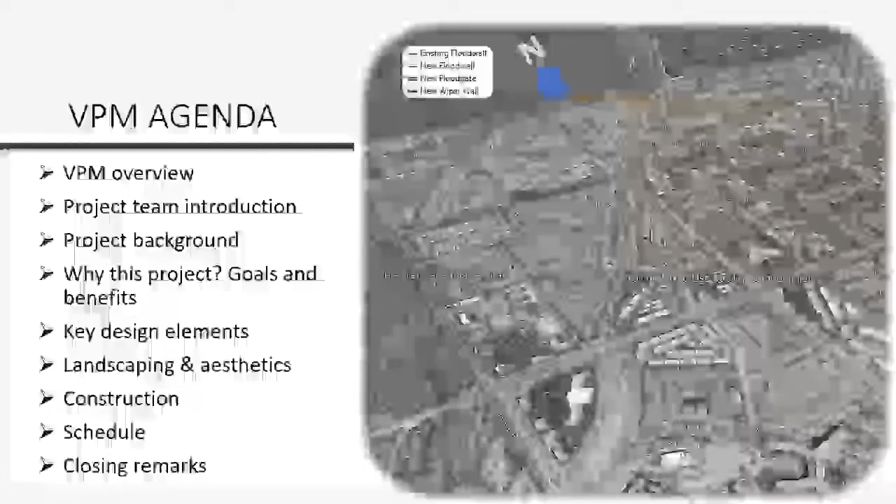The intent of this presentation is to give a broad perspective on the Rawhide Wash Project. We have an agenda that's listed here down the side of the elements we'll be covering in this presentation. We'll start with an overview of the actual virtual public meeting and some details that you'll want to know about with regard to that. We'll introduce our team.

We'll give a bit of a background on the project. We'll talk about the goals and benefits, introduce some of the key design elements, the landscape aesthetics, the construction elements. We'll talk through the schedule moving from this point forward, and then finally we'll wrap up with closing remarks.

Although it would certainly have been our preference to be able to conduct this meeting personally and to be able to see each of you, given the COVID conditions and the current social distancing requirements, we opted to go with this virtual public meeting format.

With regard to the schedule of this format and the meeting itself, we would like to set an official comment period that will begin January 18th and then extend for 2 weeks, ending the close of business January 29th. With regard to the media links and everything that's up on the site where you started this presentation, we will definitely keep those up, and they will remain active and available during the course of the entire project.

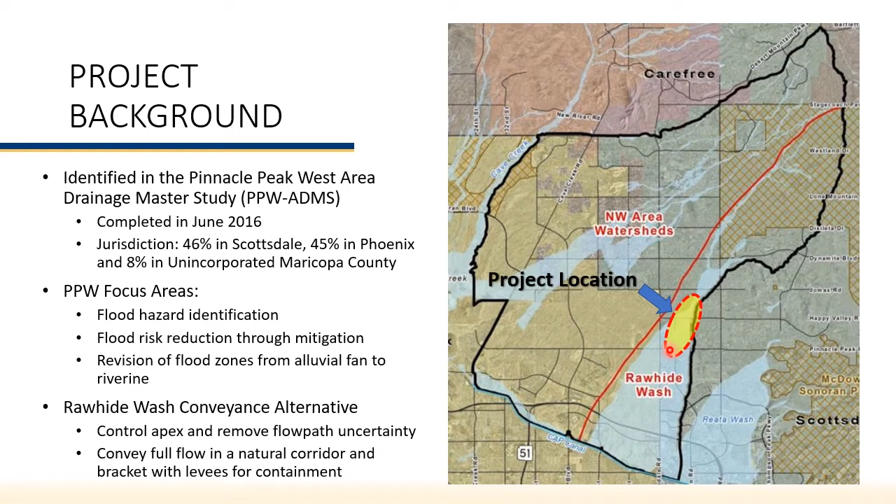The construction portion of the project is primarily located within the City of Scottsdale. All of the construction that we are designing and doing is occurring within the City of Scottsdale, within this reach I'm showing here. Part of the project's deliverables and goals will be to do some redelineation of the Federal Emergency Management Agency, FEMA, floodplain within the City of Scottsdale and the City of Phoenix, all the way from the fan apex, which is indicated by the star north of Happy Valley Road, down to the confluence of Rawhide Wash with the Central Arizona Project dikes, in particular dike number 2, that extends along the north side of the CAP Canal and contains pretty much all the flow. It's a very large dam, and if you've ever driven past that, you can see that it's a very large dam-looking structure.

Overall, with the construction of this project, there is going to be a removal of just under 1,900 acres of land from the floodplain. That's going to be converted from this current alluvial fan floodplain that is generally outlined by this limit here, and the red area is going to be removed from the special flood hazard area, and the blue will remain in a special flood hazard area. You can see the split between the City of Phoenix and City of Scottsdale acreages, and this project design will be such that it will mitigate the 1% annual chance exceedance event, or in layman's terms what is commonly known as the 100-year event.

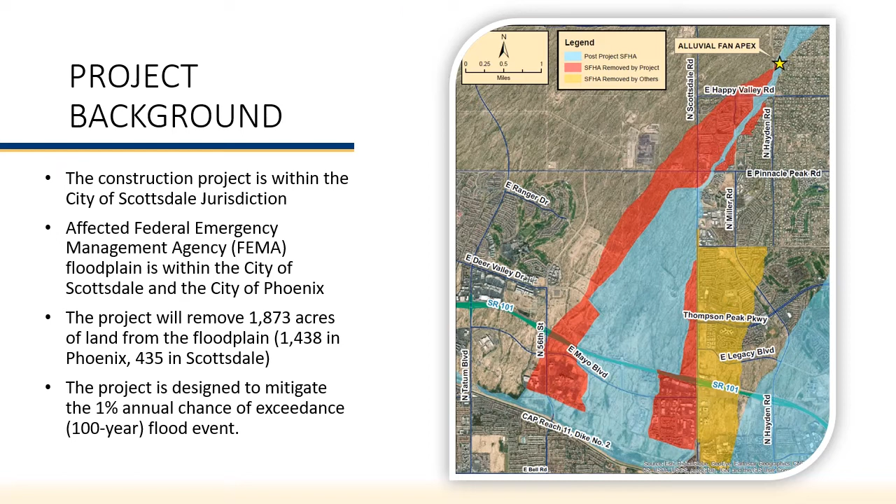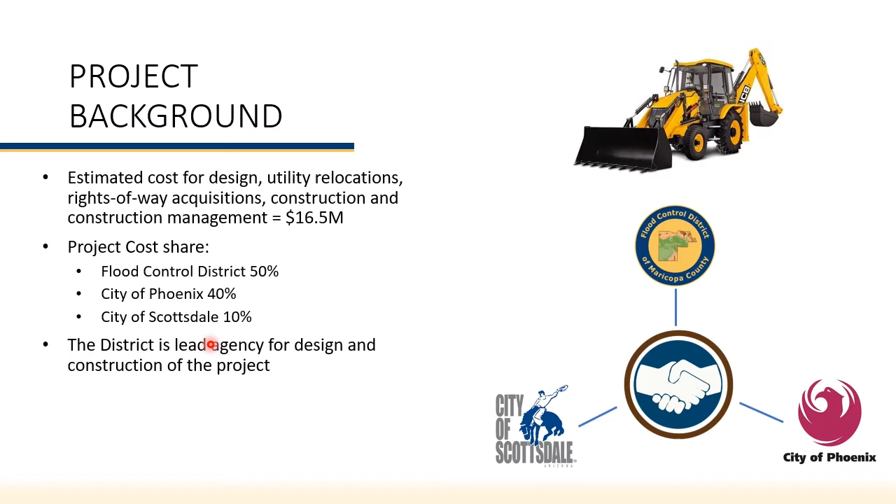At this point in time, we have an estimated cost for the design, the utility relocations, the right-of-way acquisitions, construction, and construction management of around $16.5 million. That cost will be shared between the Flood Control District at 50%, the City of Phoenix at 40%, and the City of Scottsdale at 10%. The district will be the lead agency for the design and construction of the project, but there is lots of input from the project partners, Scottsdale and Phoenix, and in particular Scottsdale, since most of the construction is within the City of Scottsdale.

Regarding the official authorizations for the project, there have been several IGAs and resolutions adopted by both cities and Maricopa County, through the Flood Control District, beginning with a resolution in April 2018 that authorized the Flood Control District to develop the IGAs with the cities. Those IGAs were originally formulated and approved in January of 2019, and authorized the design, rights-of-way acquisition, and utility relocation. So it got the ball started on the design process. In March 2020, another IGA was created that authorized the construction management and operation and maintenance of the project. Within that IGA was a provision to move towards a project delivery process called construction manager at risk.

What that means is that the contractor, in this case Rummel Construction, will participate in the design process and then provide a bid estimate that will be locked in once it's finally approved, and there will be no room for change orders or anything along those lines. So it's a way to get a project delivered, and there's more conversation about this process and its benefits in the detailed presentation that is also on the website that you can download and listen to at your leisure.

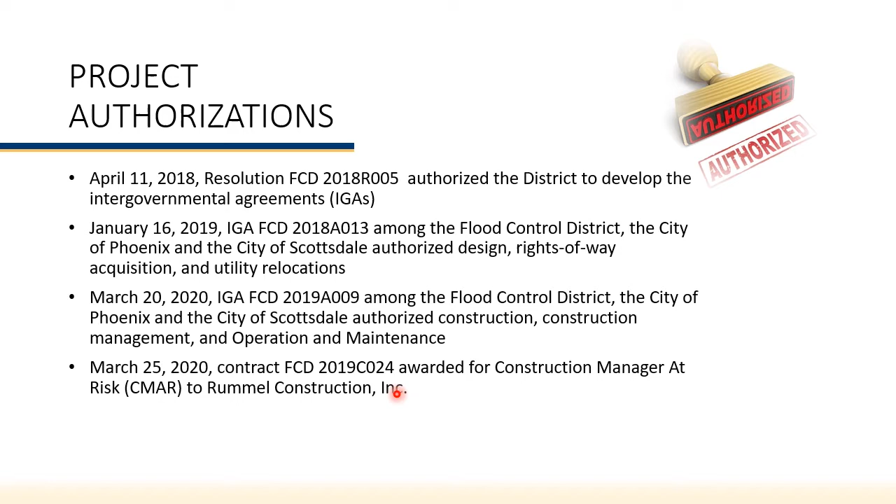This project has many goals and benefits that I wanted to briefly touch on. First of all, with the construction of this project, we're providing 100-year flood protection for more than 850 homes and buildings that are currently at risk. That's across both cities and even the unincorporated county areas, but the lion's share of those 850 structures lie within the City of Scottsdale. There's going to be a reduction in the actual floodplain, which will lead to not having mandatory flood insurance for mortgage holders on properties that are currently located in the special flood hazard areas that will not be after the FEMA process is completed.

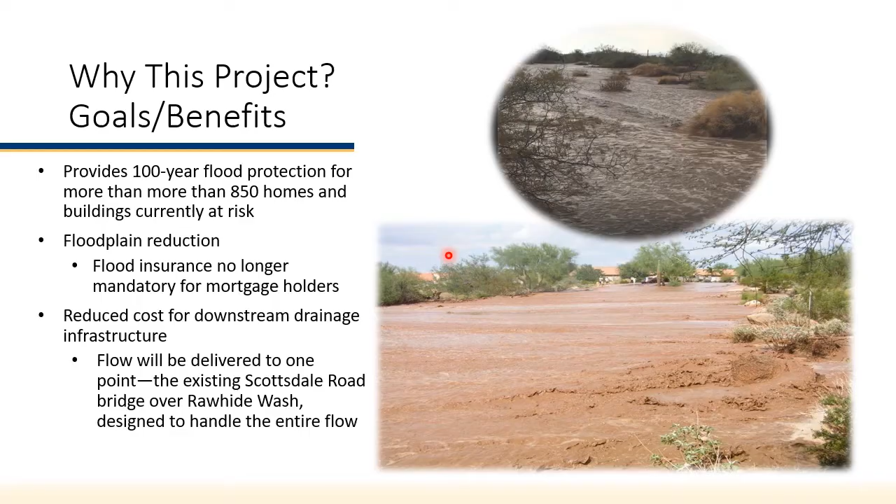There's also a reduction in cost for downstream drainage infrastructure because of the nature of an alluvial fan. There's a lot of potential redundancy in drainage infrastructure costs in the downstream area that will be removed by the building of this project. The flows will be captured and conveyed to one point that will then be available for the next project downstream to pick up and continue on downstream towards the final destination at the CAP Bureau dikes.

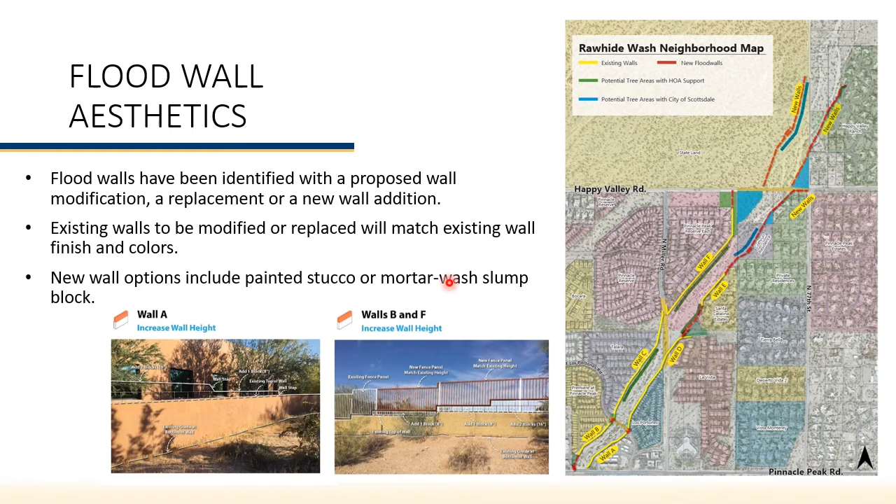In the areas that we have identified disturbances for, we know that we will be doing plant inventory and native plant salvage per the City of Scottsdale ordinances. In general, the width of the disturbance area adjacent to the existing corridor walls along the Rawhide Wash in the developed areas is somewhere between 30 and 40 feet. It may extend out even further by 10 or 15 feet in some areas where we have exceptionally deep need for erosion protection. But the reality is most of it's in that 30 to 40 foot width, and some are much less than that.

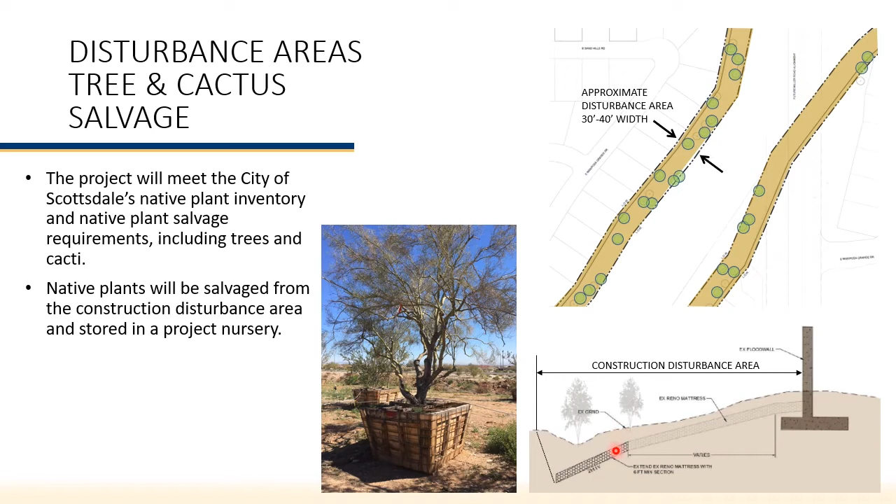The native plants will all be salvaged as required and nurseryed, and then the intent is to put them back into the wash at locations where they make the most sense. In the disturbed areas, the restoration of the landscape is an important element of this project as well. As we discussed before, there is going to be a limit of disturbance, and once the walls are constructed and the erosion protection's in place, the grade will be restored mostly back to the original grade that's out there now, and then the revegetation will be completed.

Three components. The salvaged material will be revegetated back, hopefully in the same or near the same areas where it came out. There will also be the use of the flood control district's tall pot trees, which are pictured in this area right here. They grow these in a PVC tube, get them established, they get planted, remove the PVC tube, and they have a really high success rate with these taking root, and they don't require irrigation. So that's something that will be used extensively in the project as well.

And then finally, hydroseed. The hydroseed will bring in a native desert plant mix of seeds that are already out there, for the ground cover areas. What that might look like after a few years of growth is up here in this photo. So the restoration will be completed at the end of the project. There will be a 10-foot clear zone maintained adjacent to the walls for maintenance and inspections. But for the most part, the intent is to restore the vegetation back, with the potential within several years of coming back to what is out there now.

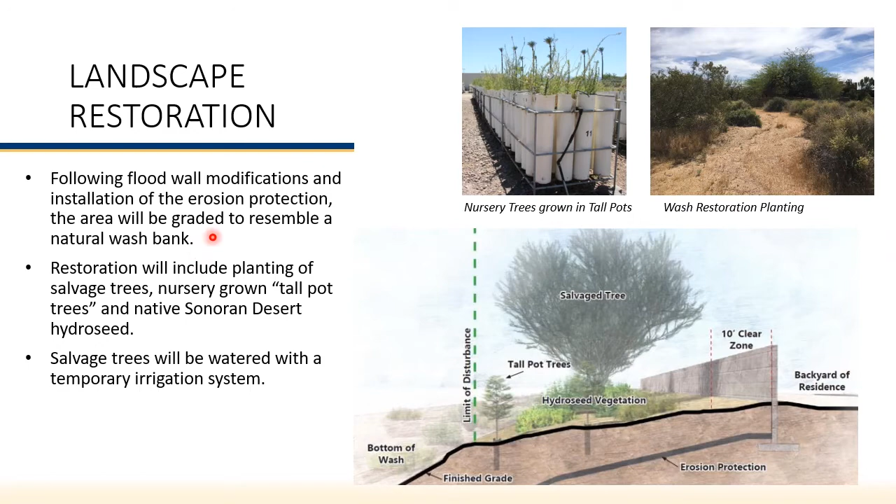Also, for further details of the landscape aesthetics and aesthetics of the walls, please see the recorded version of the landscape and aesthetics details presentation that's on the website. You can find that at the same place where you're viewing this from, and it will go into much greater detail on some of these elements.

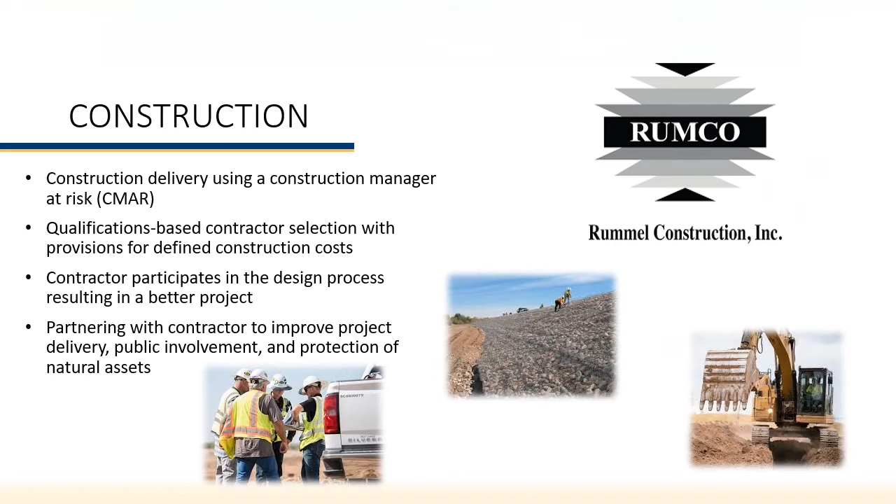By way of a project timeline, we'll start with where our 60% design submittal was made in March 2020. During the review at that time and looking through those 60% designs, the discussions began with the Miller Road project, and officially as of October 2020, the Miller Road project started and was underway. And the beginning of that project definitely shifted the overall Rawhide Wash project design schedule out to accommodate what would eventually be a portion of that Miller Road project, which is the bridge and abutments and the approaches at the crossing of Rawhide Wash.

Those elements now have to be incorporated into the Rawhide project. So we had to kind of put the Rawhide on hold for a bit while we waited for Miller Road to get caught up. We're here at our virtual public meeting at this point. The intent is, once we get through with the meeting and have received public comments, and some additional information out of the Miller Road project, we'll wrap up and finish our 90% design package and make a submittal to the reviewing agencies by the end of February 2021.

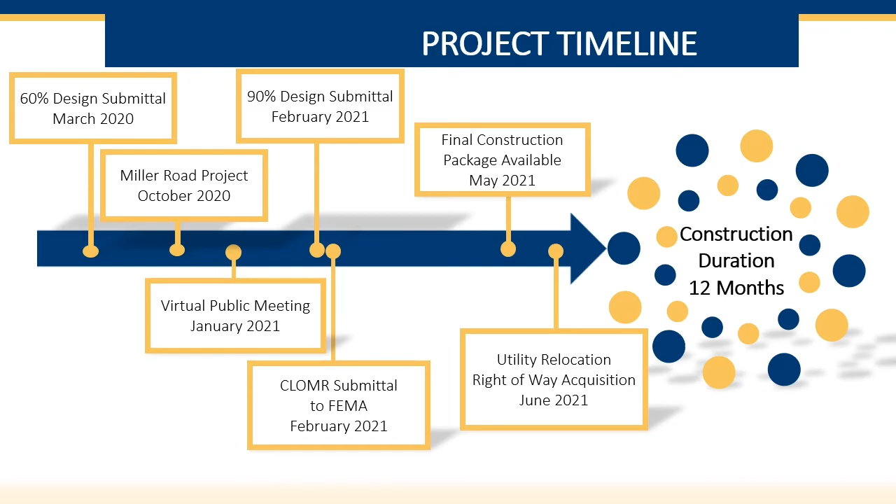So with that, we conclude our presentation for this Rawhide Wash Flood Hazard Mitigation Project.

The next step was to move into a preliminary design phase, which began in early 2018 and lasted through 2019. Basically, that included a refinement of all the new flood wall limits and types. There was an analysis of the Los Portones Drive and Happy Valley Road crossings to determine what kinds of alternatives might look the best there. And then we also looked into various types of new erosion protection.

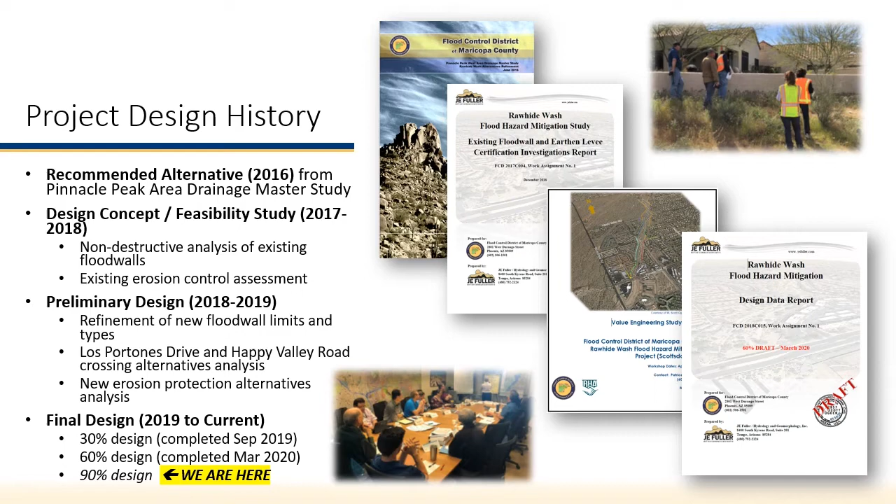Within that time frame too, in the preliminary design elements, we also had a value engineering study wherein we took the elements that were conceptualized at that point and did a value engineering analysis of those things. At the next point, we stepped into the final design. We started with a 30% design submittal that was completed in September 2019. We followed it up with a 60% design that was completed in March 2020, and we are now at the point of getting ready to submit our 90% designs.

Looking at the overall project, there are several what we call key design elements. Referencing this exhibit here on the right-hand side of the slide, I want to just give you an overview of the project in general. So this dashed line here is the project design reach. This is basically the reach of area that is going to be part of this design and construction project that we are discussing today.

There are several elements shown on this map that compose parts of the key design elements. We have existing walls that are shown in these orangish colored lines. There are going to be new flood walls that are shown in the yellowish colored lines along here. And then finally, these green colored polygons are the areas of disturbance that we anticipate within the wash boundary. These are the areas that we anticipate having to get in and touch, remove vegetation from, do salvage, and then revegetate and replant after the project is finished.

This star up here represents the apex of Rawhide Wash, and Rawhide Wash is currently delineated as an active alluvial fan. By that it means that when the flows come down from Rawhide Wash and hit this general vicinity, during major events, something bigger than a 10-year storm, you begin to see the flows break out and start going this direction down through here, and they do that in kind of a fan type of a wedge.

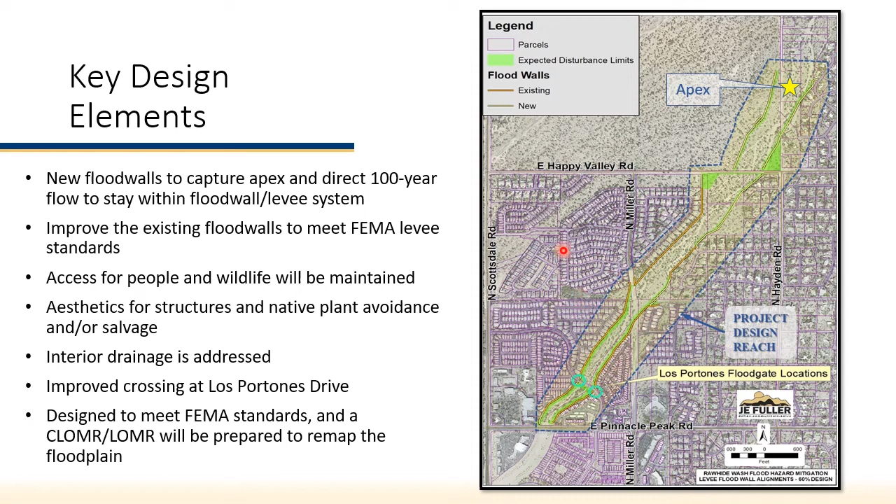One of the first aspects that we looked at were the existing flood walls that were constructed with the private developments through the watercourse corridor of Rawhide Wash, essentially between Happy Valley Road and Pinnacle Peak Road. We looked at several components to meet all of the FEMA requirements for what eventually will be a certified levee system.

We had to evaluate the freeboard containment, and when we talk about freeboard, it is basically a safety factor that is required with any kind of a levee system, wherein you can see in this exhibit we have the design water surface elevation here in blue, and let's assume that at a 100-year flood, that's where the water would attain the water surface elevation. To meet the FEMA requirements, we have to add a freeboard to that, and then any structures that are in the containment have to contain to that freeboard elevation.

The minimum in any location is 3 feet. Typically it's 3.5 feet, and then around structures where we constrict the flows, it could be as much as 4 feet. So there's a significant amount of freeboard that occurs, and much of the improvements to the existing walls are solely required to meet this freeboard requirement.

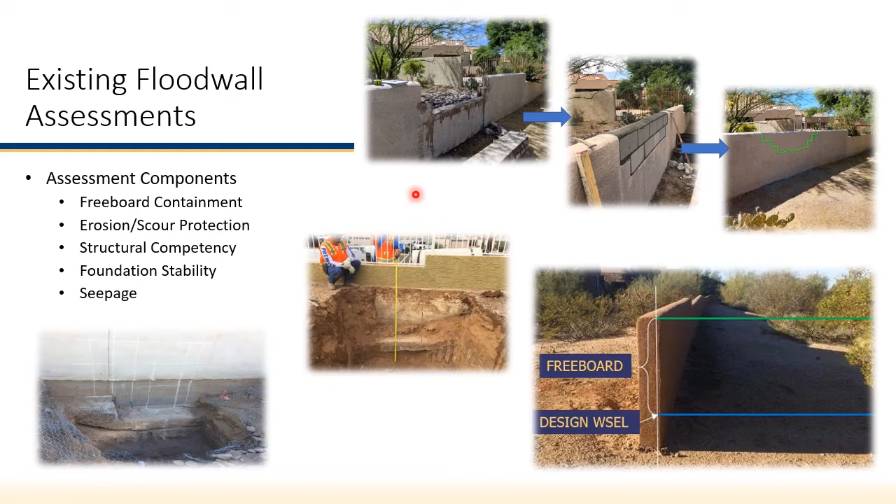One of the design aspects for the project is going to be taking a look at several of these existing walls where we know that the flood wall height to meet the FEMA freeboard requirements is not sufficient. In those cases, we'll be looking at adding courses of block, since most of these walls are masonry walls, in the form of anywhere from 0 inches to 24 inches in raises.

And the iron fence panels that are on the top will be removed and then refabricated and then replaced, with the intent of not changing this top profile at all, keeping and maintaining that top profile, but just adding in the necessary block to achieve the freeboard. In most cases, just get the freeboard in place.

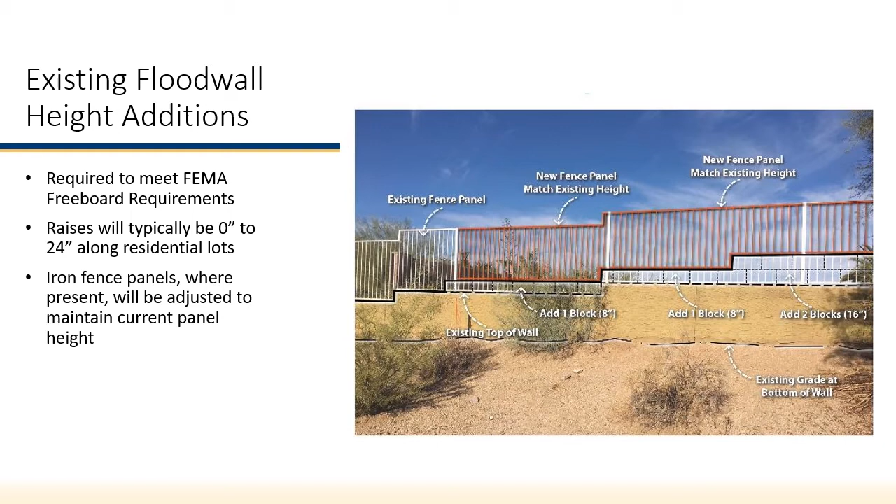In order to help residents visualize the amount of raise that's going to be envisioned for the project, we have developed a series of maps that are posted up to the same site as this presentation. The file name for that should be Existing Floodwall Raise Maps PDF, and it's basically a PDF format document. And as you can see, this is an illustration of one of the pages. There are several elements going on here.

There's a legend, and the amount of raise that is anticipated is color-coded in 8-inch increments, and you can see there are various color coding all through here. Again, most of the residential units are anywhere from 0 to 24 inches maximum in raise. These other elements here where it gets much higher are in locations that are generally not adjacent to homes.

There's a whole series of these maps, and each window cut walks up the watershed and then turns and comes back down the watershed. There's 38 individual maps in that particular PDF file. On each map, there is a north arrow and a scale, so these are scalable if you want to measure.

And also, each address for the parcels that are within the design area has been added to these documents, and you can see the illustration here. So this particular address is labeled as such. These are searchable within the Adobe Acrobat file, and you can use Acrobat's find feature to help find your address if you're adjacent to the wash.

Basically what you would do is open your document in Adobe Acrobat Reader, which is a free application that is available to anybody. And then once you have that document open, you'll simultaneously push the Control and the F keys, and you'll get a little dialog box that'll open up within Adobe Acrobat. Within that dialog box, you can type in your address using something similar to this format, and then hit the Enter key, and it will search the document and find it if it's in there.

If it's not in there, or not in the particular format you entered, you may have to adjust that a little bit. But there is a way to search if you want to, or you can just walk through the document and find your particular house if you happen to live next to the wash.

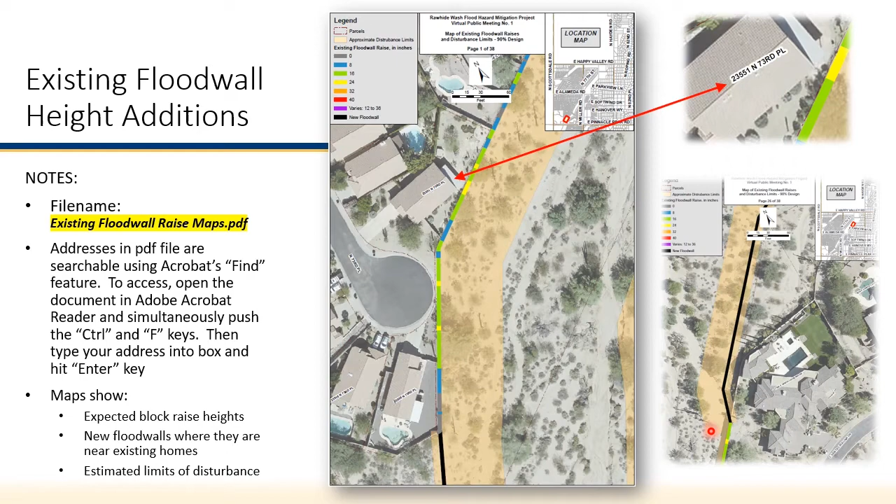Regarding the scour protection at the existing flood walls, several of the existing flood walls have scour protection in place in the form of what we call Reno mattresses, which are basically, if you can imagine, a wire mesh basket that's filled full of rock, and you can kind of see there's a picture right over here of what the wire mesh might look like. And it would be filled with rock that looks like this. When it's in place, it looks something like this.

This is one of the walls that's across the Miller Road corridor right now, and in this particular location, you can see where some of that Reno mattress is actually exposed. All of the erosion protection that's out here that's existing is buried at this time, and that will continue to be the design metric as we move forward. Several of the areas we're looking at will probably require some augmentation of those existing mattresses in the way of adding some mattress out on the ends to give further protection for a deeper scour. And that will be done as a part of this project.

There are also areas where we have existing flood walls where there is no erosion protection provided, and we'll be constructing new gabion mattresses for that. And the difference between a Reno mattress and a gabion mattress is basically the depth of the mattress itself. A Reno mattress is typically 9 inches and a gabion mattress is 12 inches.

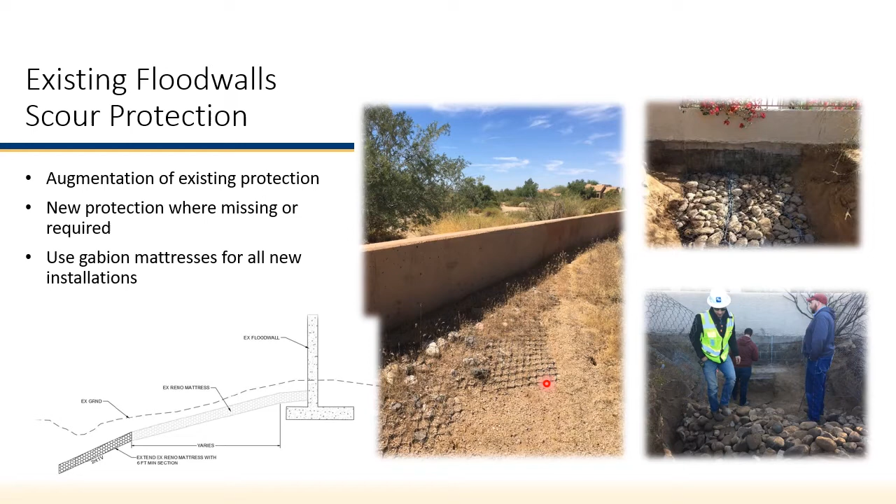During the course of the structural assessments of the existing flood walls, it was determined that there was one flood wall that did not have the structural integrity necessary to be able to withstand the flood flows against the wall. This is what we refer to as Wall E, which basically extends north of the Miller Road crossing along the eastern edge of the watercourse. This particular wall is going to require some pilaster augmentation along the wall itself to just add some strengthening measures so that the wall basically doesn't get pushed over when the flood flows come against it.

There are also a few locations where we need to extend the footer a little bit to add some additional foundation stability to a couple of walls. The limits of those are pretty limited. There's not very many areas where we need some of that.

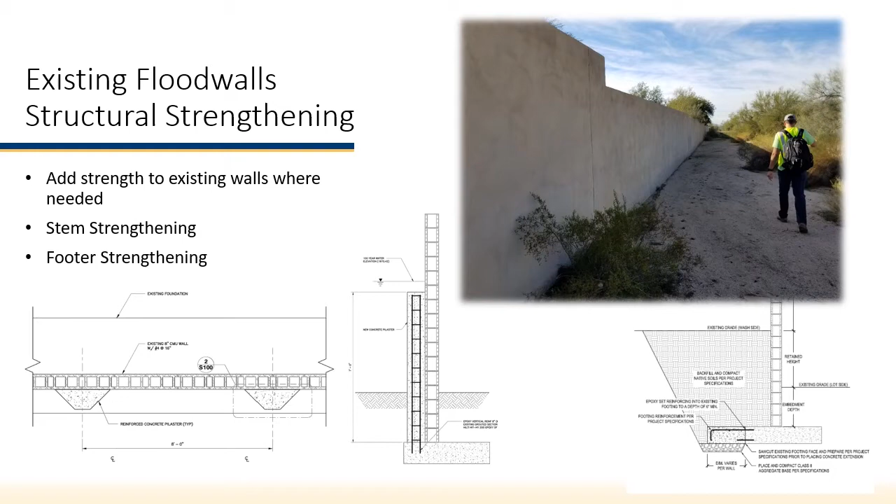When it comes to new flood walls, of course, there's going to be brand new construction from the footer all the way up to the top of the wall. We anticipate using masonry block construction for all the reaches of new flood wall. In some cases, we might use a slump block type configuration, but in all cases, it will be some sort of a masonry construction. Of course, the aesthetics are going to be geared to match either the nearest existing walls that are within the area, or possibly, we'll use something that will be along the lines of a slump block.

This is an example of what that wall might look like in an area of the project in the northern reach. Typical wall heights for the new flood walls range anywhere from 4 feet above the existing ground to as much as 8 feet above the existing ground.

As previously stated, nearly all of the erosion and scour protection that will be provided for the project is going to be either an augmentation of existing Reno mattresses or the construction of new gabion mattresses with maybe some anchor baskets at a few locations. You can see the photos in this area. The photos here and here are some locations where existing Reno mattresses were augmented a little bit, and we'll be redoing many more of them.

There's the gabion mattresses. The intent is to build them down to the full scour depth and then bury them back and allow for the replanting of vegetation and basically reestablishing of the natural wash corridor, so that they're there as insurance, they're there as protection, but they're generally not going to be seen unless there's a significant flow event that exposes the erosion mattresses.

The graphic up here on the right is an illustration of what the construction process might look like. You can see the baskets are all laid out, tied together, and then they backfill with rock of varying sizes, and then they'll put a lid and wire tie all that back up, and then eventually it'll get buried back so that the natural grade of the wash is restored.

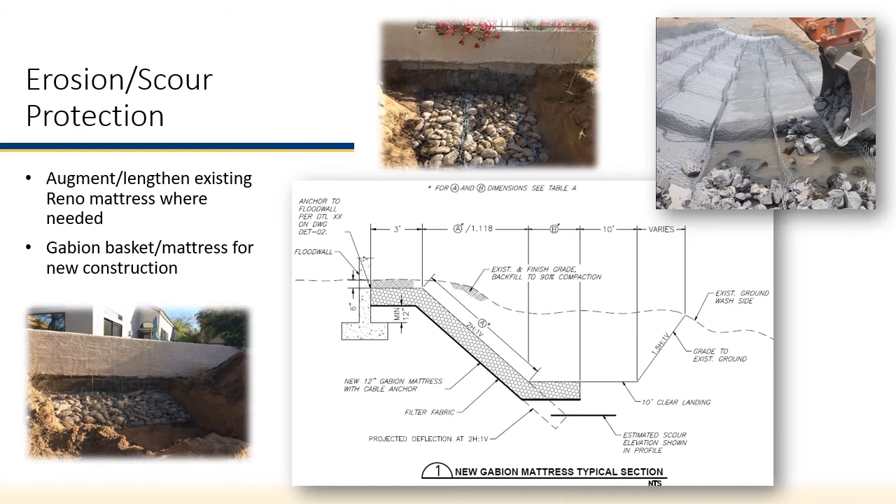Wherever the areas will drain back towards Rawhide Wash, we're going to provide a mechanism or some means for the water to re-enter Rawhide Wash, and in the same design, not allow for the flows when this is flowing full to reverse and get back up and flood the areas and kind of defeat the purpose of the levee system.

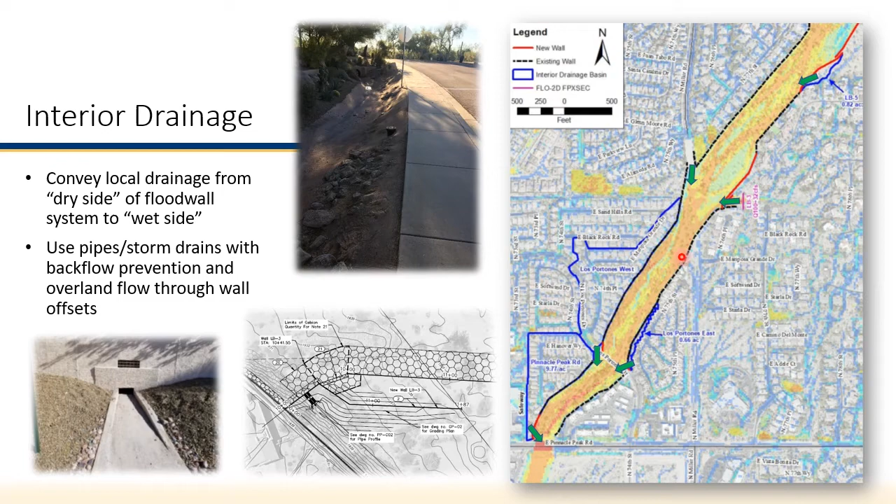And this is a ground level picture where you can see this is shooting this direction looking down. You can see where the sidewalk here enters into the wash. This is a pretty major access point for a lot of folks to enter into the wash. So we want to make sure that we're maintaining that, but yet we still have to provide this levee system that keeps the water from actually coming out of this and going the other direction.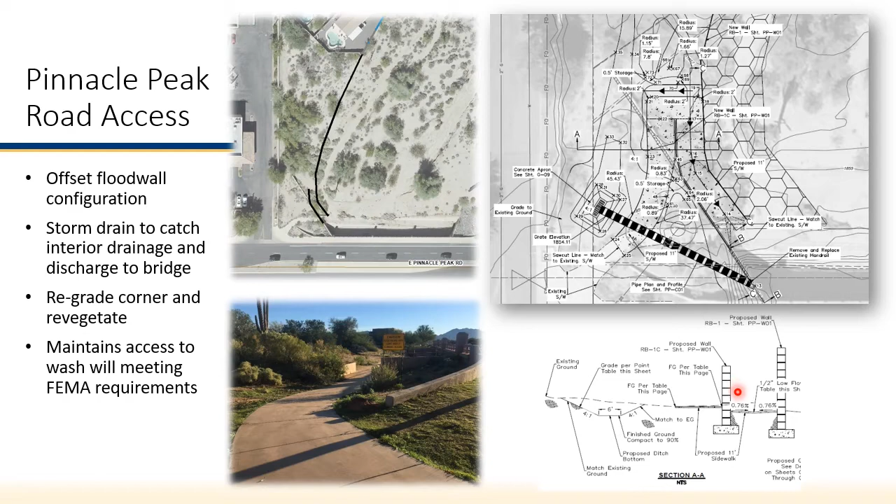One of the major design areas is Los Portones Drive. Los Portones Drive is a private road crossing that basically crosses the wash at grade, so it's right at the elevation of the flow line of the wash. Whenever Rawhide Wash runs, the road becomes impassable, and folks that would normally use this have to find other routes to get out of their subdivisions.

As a part of our project, because we're doing containment and we have these flows that are coming through here, we have existing walls that are coming to and away from the road, and we have to do something along the road to keep the flows from breaking out and then traveling down through these subdivisions and causing flooding and presenting a flood risk to those particular areas.

And so as a part of this project, we're going to use floodgates that are basically automatic floodgates that automatically deploy once the water starts getting to them. They're actuated by buoyant forces. They don't need anybody there to lift them or lower them. They automatically lift and lower based on wherever the water level is. And with their functioning, they will essentially shut off any flow from leaving the road and going down through these areas, and provide the flood protection for those areas.

In addition, the project is probably going to do some minor regrading and reconstructing of the road itself. In particular, at this western gate crossing down in this area, we need to get a little more elevation on the road where the gate is located to make the gate work the most optimally.

And there's also going to be some fairly significant scour protection that's going to be constructed on the downstream side of the road to mitigate the scour that's already started. And you can drive by there and see lots of rock that's placed down through here and stuff. And so that scour needs to be mitigated. Again, all that infrastructure is going to be buried with regard to the scour protection, but it will be there to keep the road in place should the wash run to the full design amount.

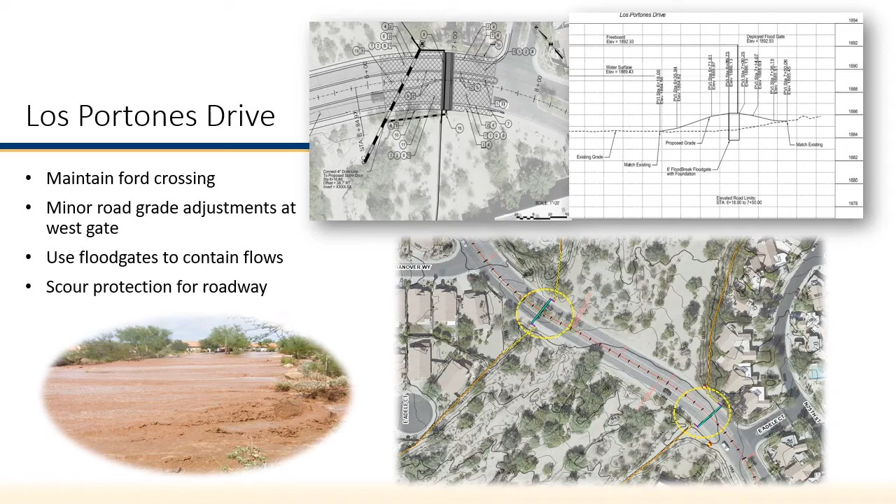So let's talk a little bit more about the floodgates themselves. The floodgates, as previously mentioned, are automatic, and they are actuated through buoyant forces by the floodwater reaching them, and then they mechanically rotate into place and then lock up. The gates themselves, when they're not deployed, are just part of the road surface.

So you can imagine this is a cross section here through what would be a typical gate installation. This would be your road surface, and the gate would be sitting there in the road surface, and you really wouldn't even know that the gate is in place, other than you just drive over it and it looks different than the asphalt.

When the flood waters begin to come and build up, you can see that there's a grate right here. If you look over here, there's a grate right here in the photo, and the water gets into the tray through the grate, begins to build up. The buoyant forces begin to lift the gate, and as the water gets higher, the gate gets lifted higher until such point as it hits a rotational point, and then it locks into place and then stays there until the water recedes.

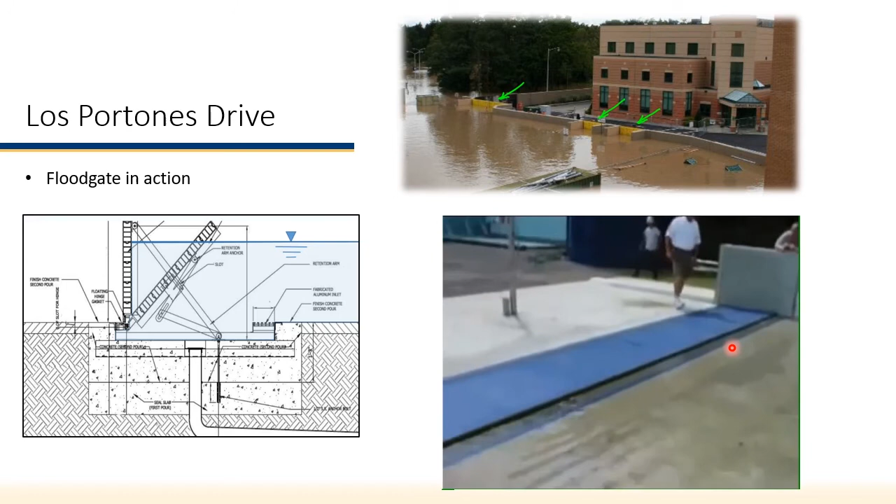We have a little video here that I want to click on that hopefully will give some illustration as to the functioning of the gates. So you can see water's building up. They're feeding water into the system as if in a flood situation. There's a wiper wall, the gate, the grate, and the other wiper walls here. That gate rotates and interfaces with that wiper wall to create a watertight seal.

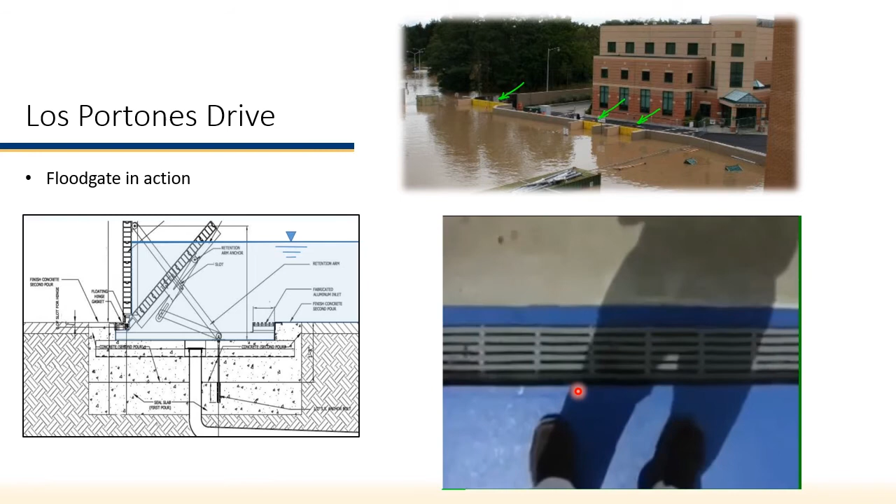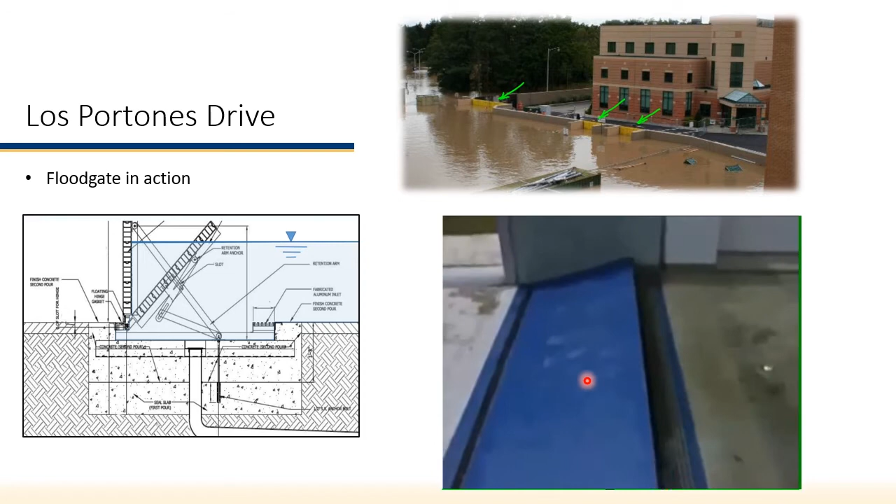That's a good picture of the grate. As the water begins to flow into there, it gets into the tray. The higher the water gets, the higher the gate is lifted. Buoyant forces picking the gate up and keeping that seal against those wiper walls keeps the water on this side. You can see it's clearly dry on this side.

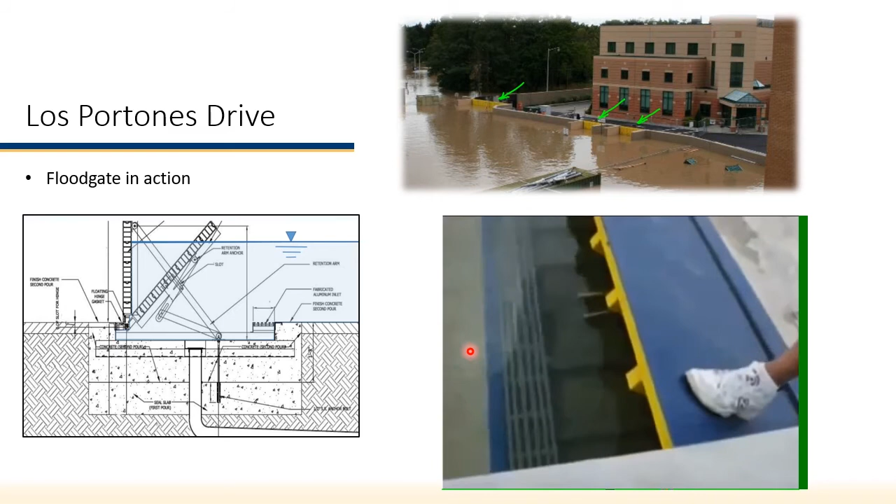And as the flood flows continue, the water gets deeper. The deeper the water gets, the more the rotation of the gate moves up. And then it continues to rotate. As the water gets deeper, it continues to rotate until bang. There the gate locks into place, and they will remain there until such time as the flood passes.

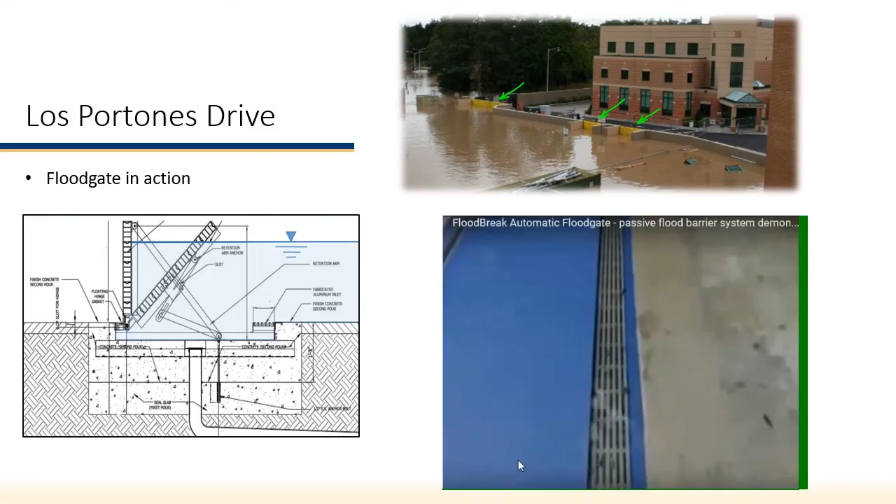So something I mentioned at the beginning of the slide presentation is a future Miller Road project. At this point in our project, after our 60% were done, the city of Scottsdale was able to come up with some money to be able to build this Miller Road crossing. And so the Miller Road crossing is going to be constructed nearly simultaneously with the Rawhide project by the city of Scottsdale. It will lag the Rawhide project by maybe as much as 6 months, probably no more than a year. At least that's the intent at this point.

And you can see here in this view, we're looking actually southerly along the Miller Road alignment. Pinnacle Peak Road's in the distance, and then the extent of Miller Road at the intersection here of East Parkview Lane. And what's going to happen is they're going to improve this road all the way down to Pinnacle Peak Road. You can see our Rawhide Wash corridor is through here, and as a part of the improvements, there's going to be the construction of a bridge to go up and over Rawhide Wash and come back down again. That bridge is illustrated in this graphic over here.

The design has really just begun for this, so we don't have a lot of details on this at the moment, but it will ultimately be worked into the overall system as part of the Rawhide system and design. The Miller Road project is in place to complete a gap in Miller Road between Pinnacle Peak and Happy Valley Road. The design began in October 2020, and these improvements have been planned for since the 1990s. The plan for this Miller Road crossing has been in place for quite a few years. It's going to be a 4-lane roadway with bicycle lanes and a sidewalk.

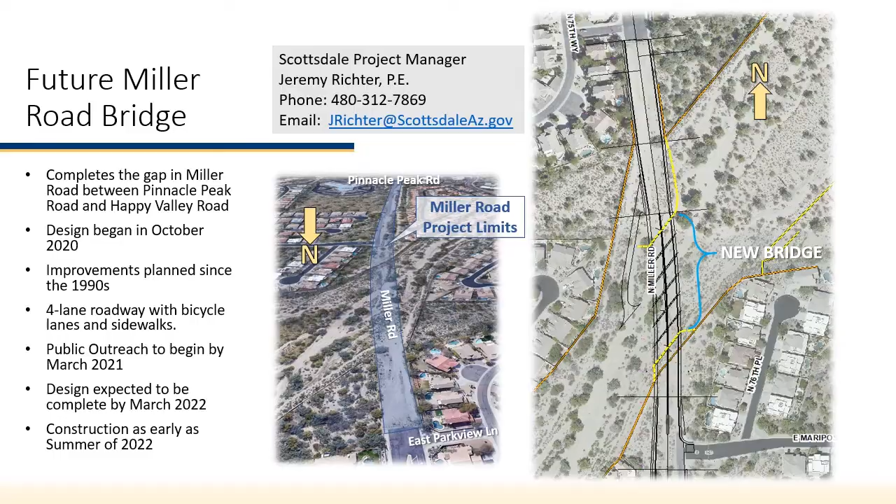As a final aspect of the project design, there will be a FEMA submittal, well, actually several FEMA submittals, but at the end of this design phase, we will be making a FEMA submittal with what eventually will be these 90% drawings once we get them in place. FEMA is the Federal Emergency Management Agency, and the submittal is basically to do a revision of the existing floodplains and remap them to reflect the new Rawhide Wash improvements. So you can see in this illustration here, this red limit is the existing floodplain limits as they were when this exhibit was created. I think this one's actually changed a little bit now, but this was the existing limit of the floodplain as it is on the FEMA flood insurance rate maps now.

The red areas are areas that are going to be removed from the floodplain with this FEMA submittal and the construction of this project. And you can see that the lion's share of the removals are all up here in the city of Scottsdale with many homes. The total structure count is somewhere around 850 structures that are anticipated to be removed by this project. So that is flood risk protection for over 850 structures.

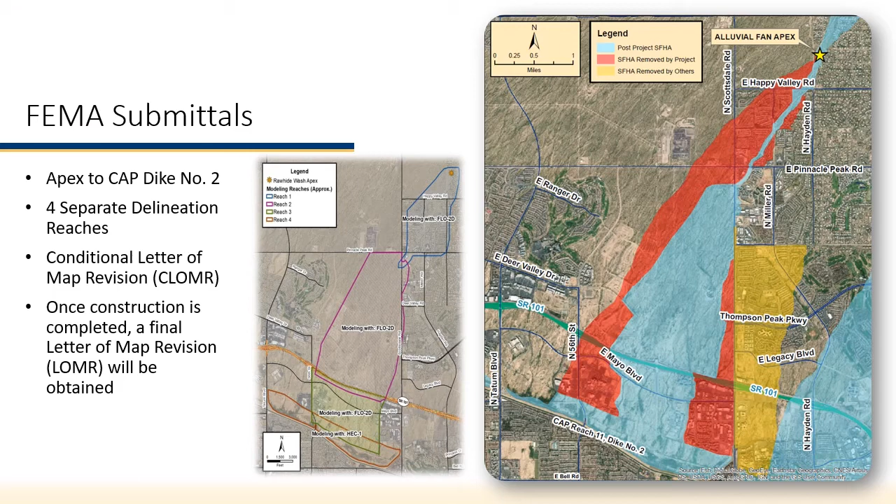Once we have that conditional letter of map revision in hand, and once the construction is finally completed, the project can then submit for a final letter of map revision, which will finalize the actual changing of the maps and the redelineating of the floodplains. So that concludes our presentation of the detailed design for the Rawhide Wash Flood Hazard Mitigation Project.

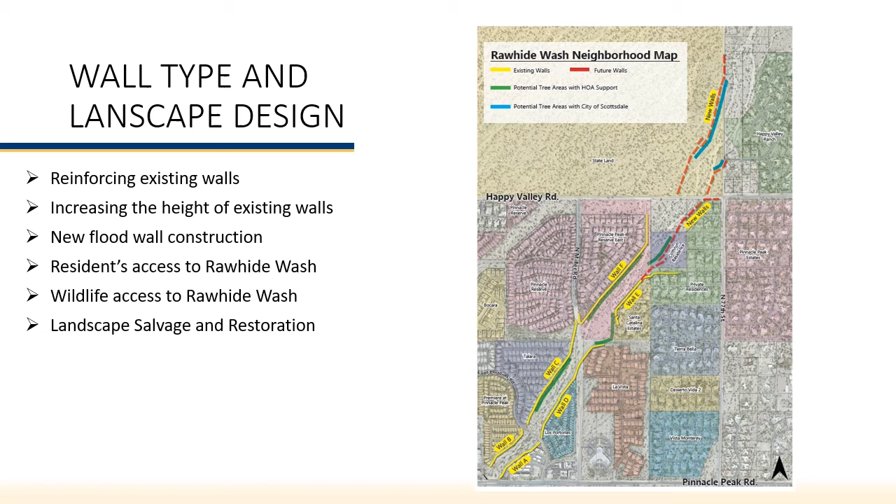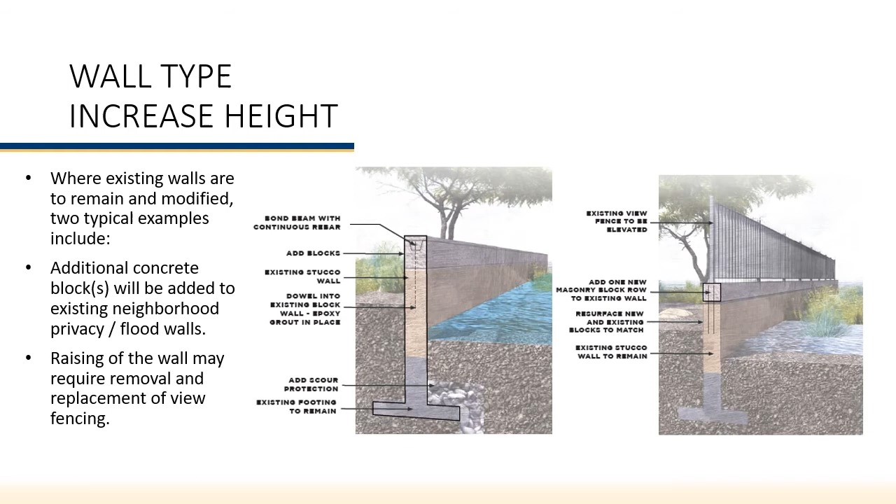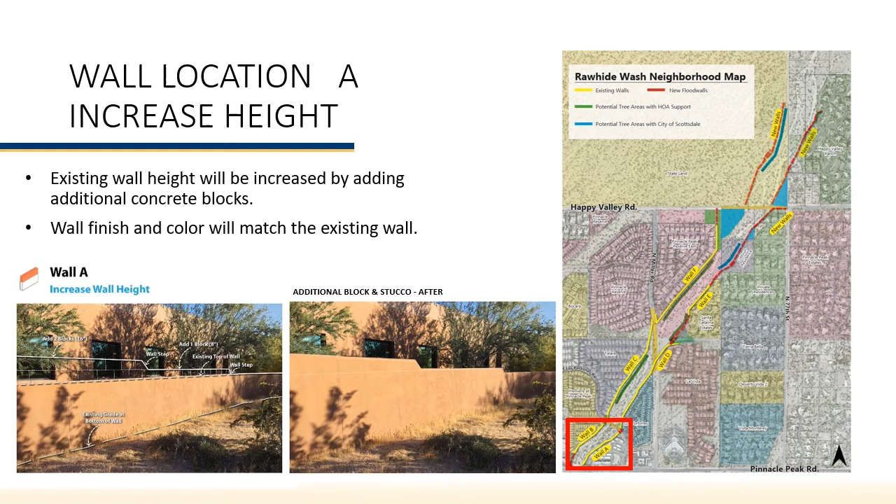By the lower left, you can see where we've sketched in the height of the new wall over the existing wall. And then the one to the right is sort of the after photograph with the additional block and stucco. Wall locations B and F will increase the height of the solid wall portion of the wall. To do this, we'll be removing the view fence, adding block as necessary, refinishing the block wall and then reinstalling the view fence.

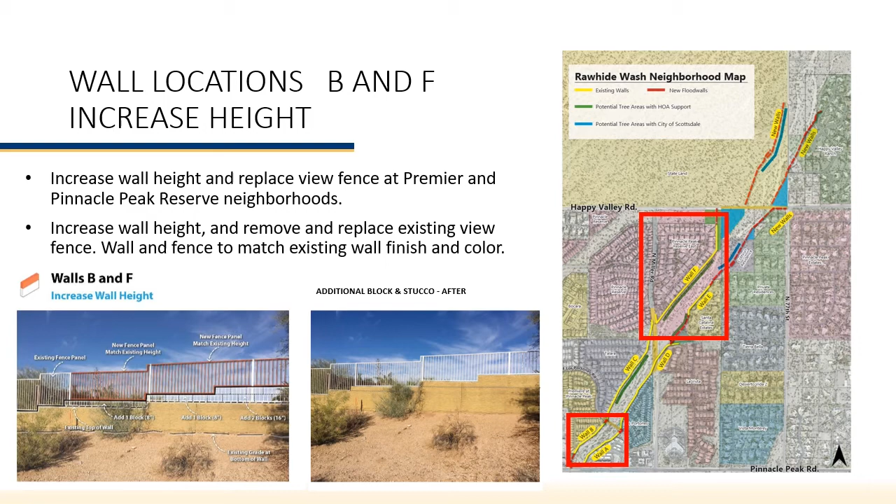Wall location C will also be increasing the wall along the view fence. This will require a little different method, since we'll be salvaging the existing view fence. The view fence is quite a custom item, and so we want to salvage and reuse that. Once the block is raised, it will have the same stucco finish and color, and then we'll reinstall and repaint the view fence.

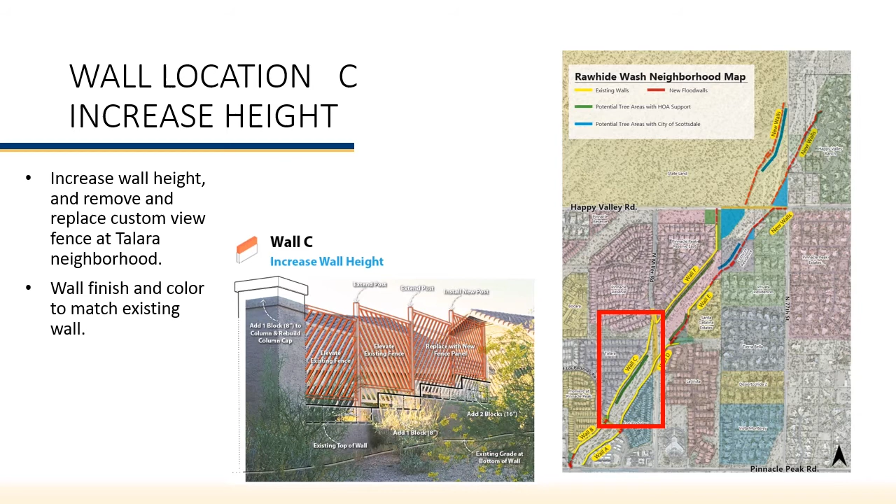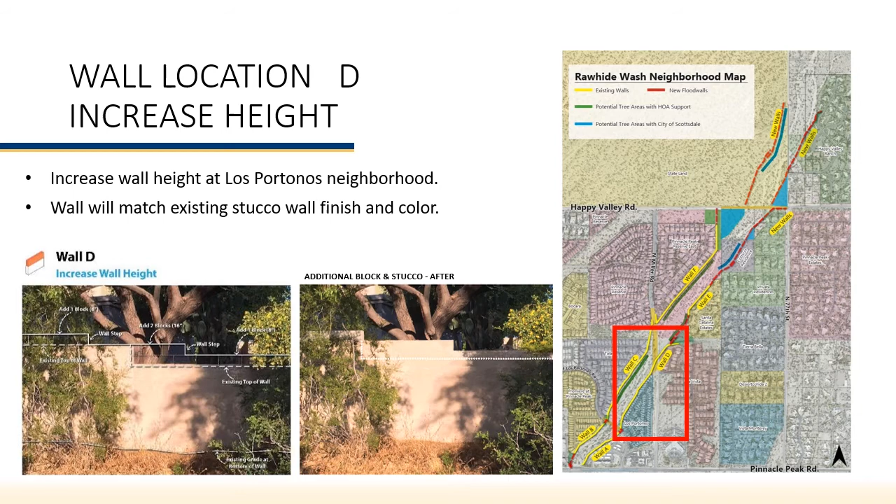Wall location D also increases the wall height. This is along Los Portonos neighborhood. This was a very straightforward wall height increase. We'll be matching the exact finish and color of the wall. Wall location E along Santa Catalina Estates will remain in place, and any wall modifications necessary will match the existing color and the finish of the wall.

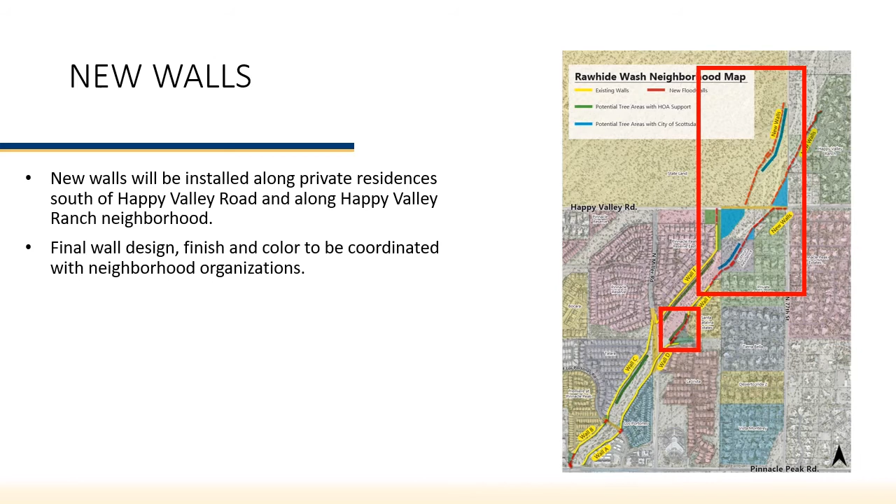New walls will be installed as part of the project. The majority of the new walls will be up around Happy Valley Road and one by Santa Catalina Estates. The final wall color and finish will be coordinated with the neighborhood. A couple of the options that we're looking at currently are the stucco finish, which everybody's familiar with and very typical in this area.

But one other type of wall that we're looking at is called a slump block wall with a mortar wash finish. This is all integral color and pretty much maintenance free. In either case, stucco or the mortar wash, we're looking to make sure that the color palette being proposed blends in as very much an earth tone in and around the native desert area.

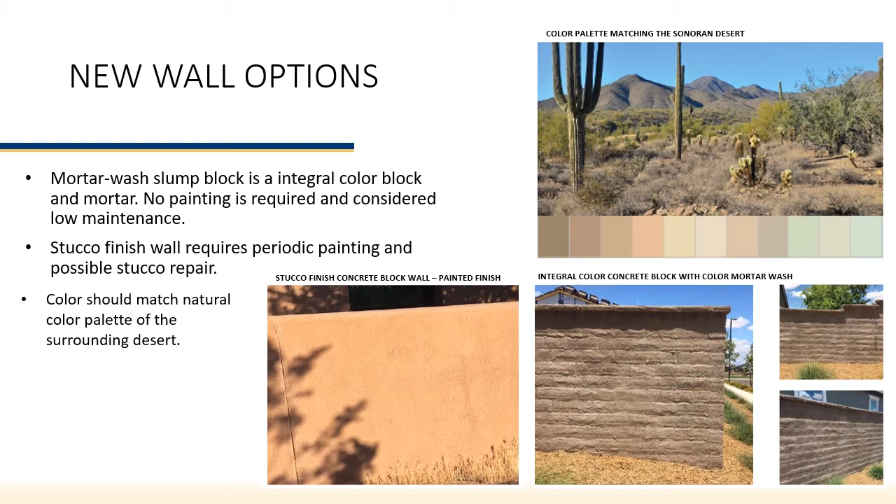We will be accommodating access into the wash through breaks in the wall itself. The way we accomplish that is we have overlapping walls, and there's a slight grade rise or grade change in between the walls. You can see it's slightly raised. So what this enables us to do is be able to open the wall, but at the same time be able to control any waters coming down Rawhide Wash, still contained within the flood walls or the elevation change. These locations are primarily at either where washes or natural washes are entering Rawhide Wash, or where we have larger areas of open space.

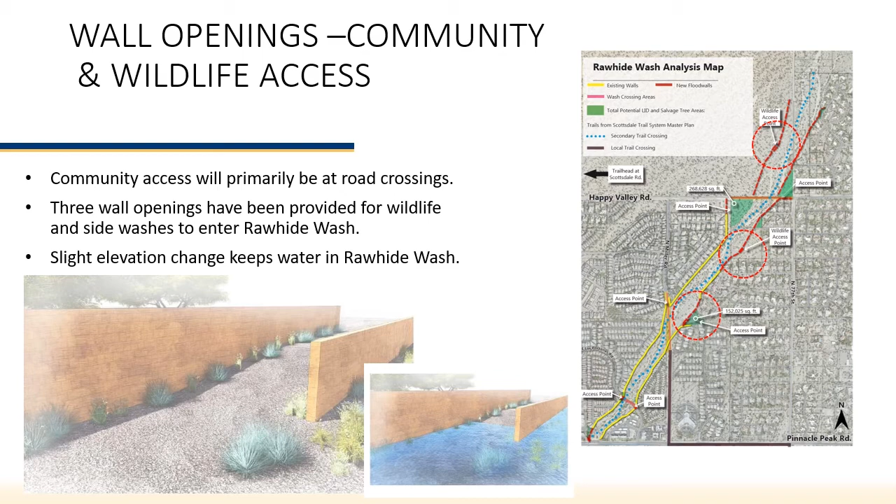In order to construct the project, we will be removing plant material and native plant material from the area. We've identified an area of approximately 30 to 40 feet width that parallels the flood walls. In this area we will be identifying the salvage trees and cacti. We'll go through a process to actually remove those materials, and all this will be in accordance with the City of Scottsdale's native plant inventory and salvage requirements. The plant material will then be placed in a temporary nursery until we're ready to actually re-landscape.

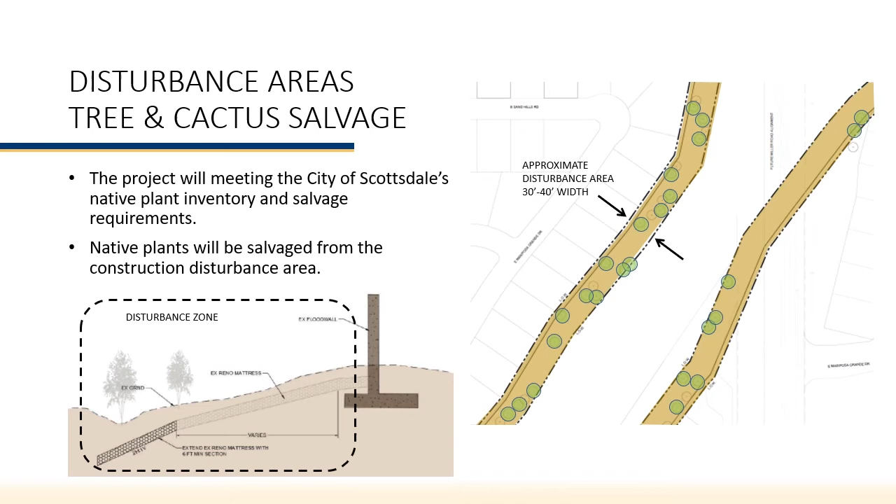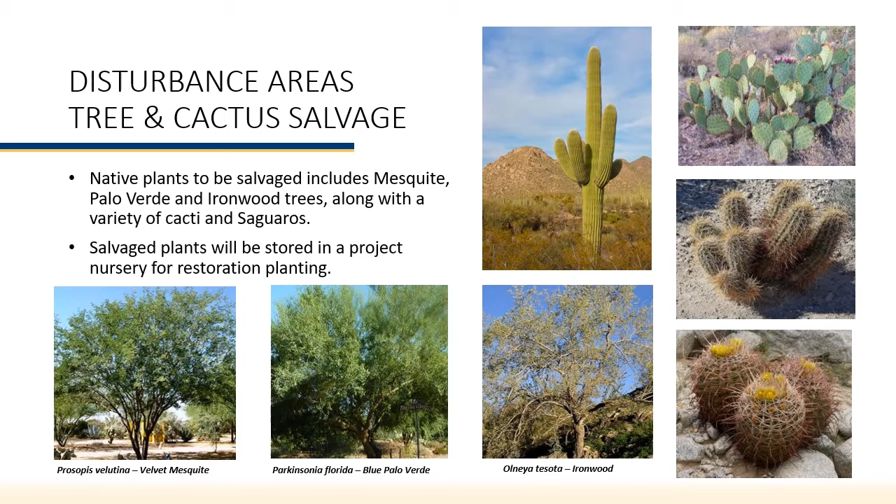The type of plant material that we will be looking to salvage are the trees, which include mesquite, palo verde, and ironwoods. And then obviously cacti of many varieties, including the saguaros. The landscape restoration for the area will really mimic what's there now. It's referred to as a xeric riparian landscape, which is really a dry wash environment.

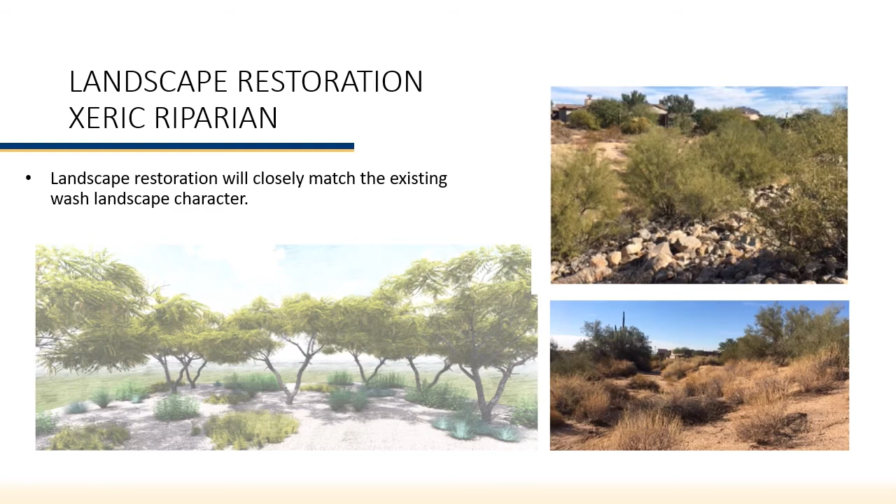As part of the landscape restoration techniques, we'll be introducing a method called water harvesting. This is a way of being able to sculpt the land in such a way that we can direct natural rainwater to plant material, especially trees. This will help them get established and ensure long-term survivability.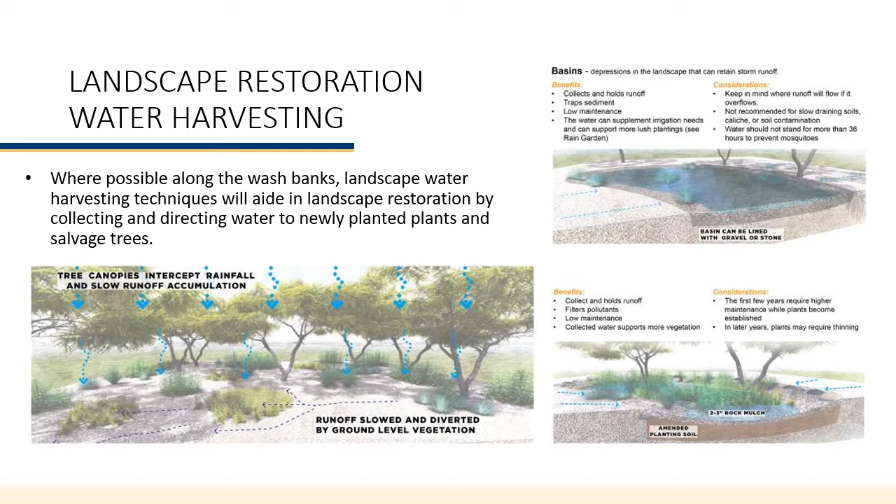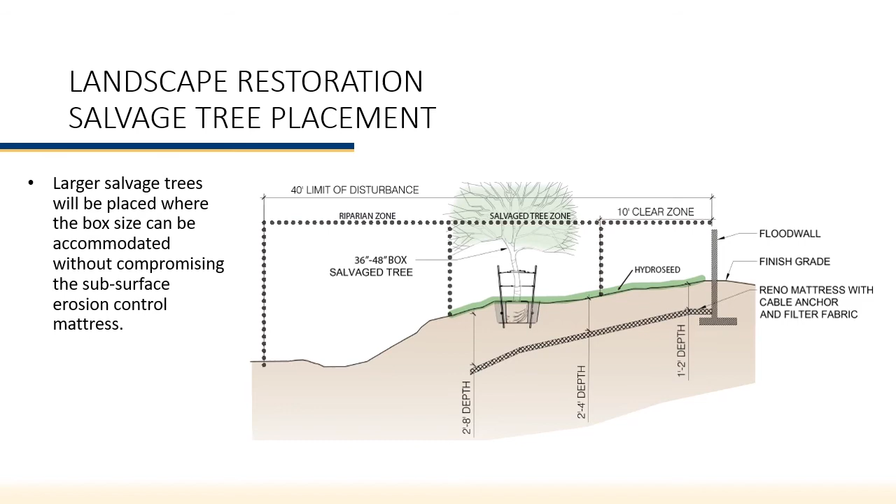Landscape restoration will follow the installation of the Reno mattress, or the erosion control. That's the hatched item that goes horizontal that shows the depths. Also, after the flood wall is in place. Once these two items are constructed, fill will be placed back over the Reno mattress, and then the landscaping can be established. The first thing we'll be looking at is location for the salvage trees. Since these are the larger trees, the larger boxes, we'll be placing those in areas where we have the greatest depth over the Reno mattress itself.

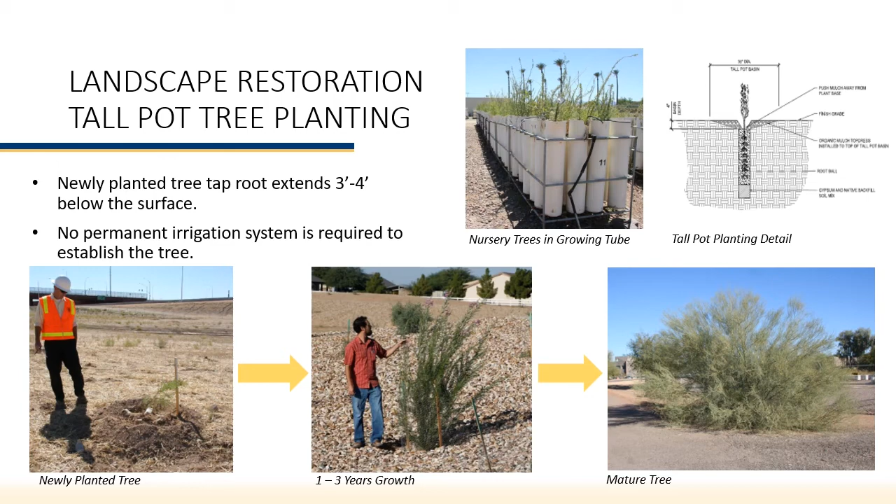The way that it's actually planted is a hole is bored into the ground. Water is then introduced into the hole, so it saturates the very lower level. And then the tree is planted, and the sleeve, the pipe that you see, or the planting sleeve, is then basically removed. Currently, the Flood Control District is getting a 70 to 80% survival rate, and these trees are basically planted without irrigation. The tall pot trees will be placed again over the Reno mattress, and we have a little more flexibility on where these trees can go depending on the depth that we have.

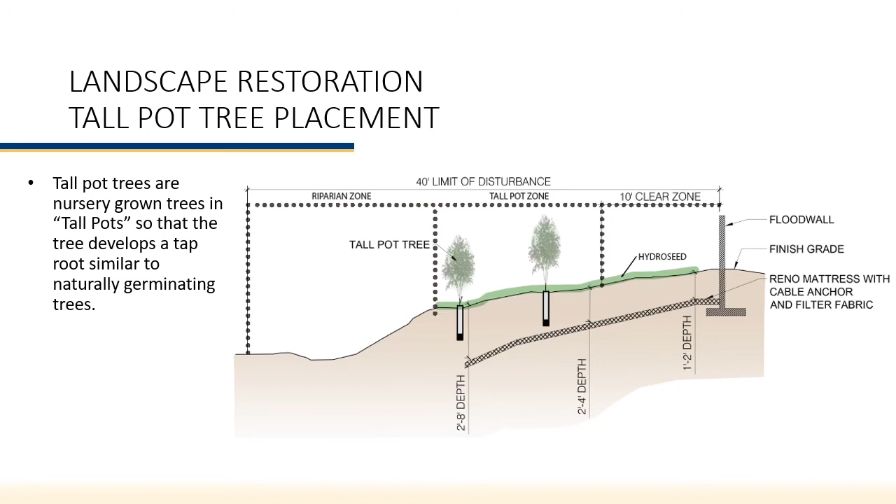Plants that will be in the hydroseeding, again, all come from this area or the same natural environment as the seed type. It will include ironwood, mesquite. It will also have palo verde, but we also have a series of shrubs and ground covers that are very common, including creosote and burr sage.

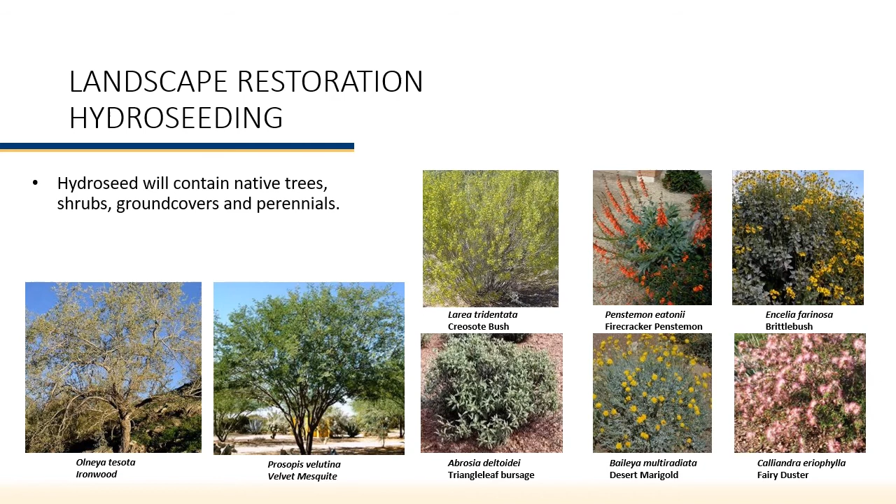The following series of slides puts the whole project together. So what's illustrated on the right is the new or revised or modified wall, flood wall. It shows a 10-foot clear zone along the wall. This is required by the City of Scottsdale so they can actually maintain and also inspect the wall. Below ground, you can see the erosion control protection, and then it will actually be plated or soil placed back on top of that area.

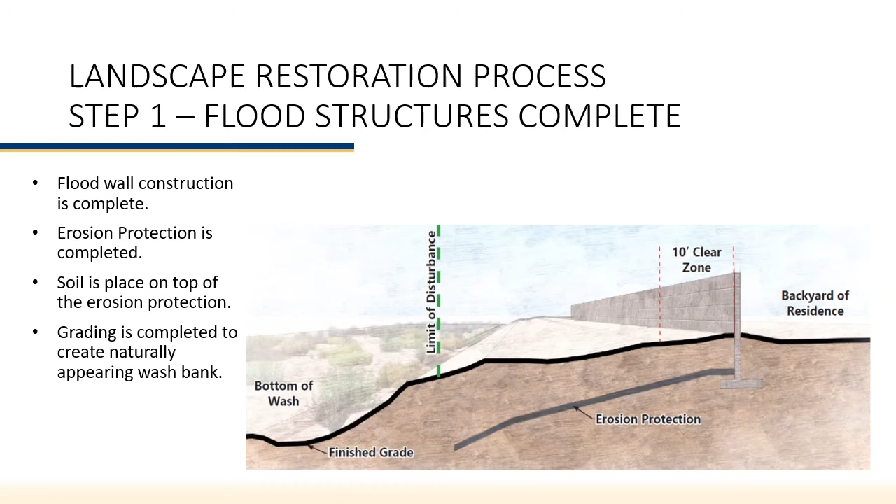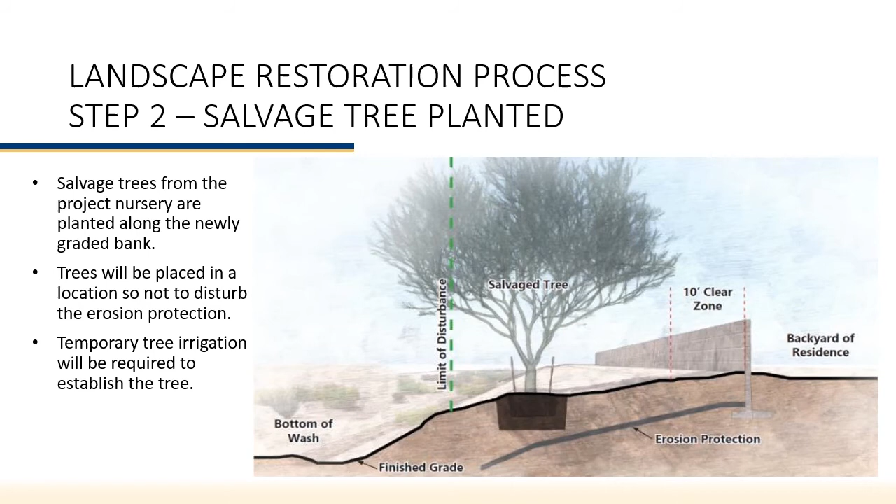It will be graded to somewhat a natural contour or basically landform, and from there, the landscape process begins. The landscape will actually include the salvage trees, as we mentioned before, on an area where we have the depth of earth between the top of the erosion protection and the finished grade. Then come the tall pots, again, where we have the depth. The final operation and restoration is the application of hydroseed. One thing to note is the salvage trees will be on drip irrigation for approximately 3 years for their establishment.

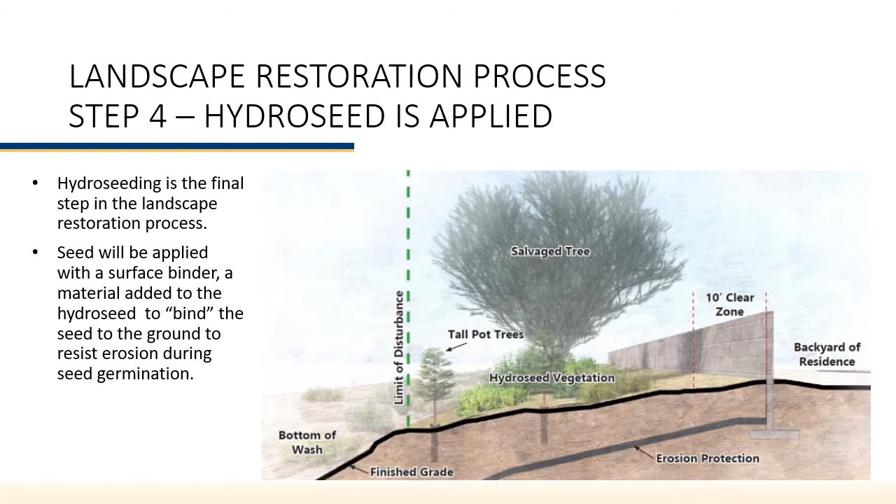Hello everyone, I'm Jeremiah Hancock, Project Manager with Rummel Construction. Rummel Construction was selected to be the contractor on the Rawhide Wash Project, and in this portion of the presentation we're going to be talking about Rummel as a company and some of our history and background. We're going to be talking about the benefits of a construction manager at risk, or CMAR, delivery method of a project. We're also going to be talking about some high-level construction approaches on how we plan to accomplish this job with minimal impact to the environment and to the surrounding neighbors, as well as talk briefly about some of our proposed interaction with the neighbors that are surrounding the wash that will be directly impacted by the construction activities.

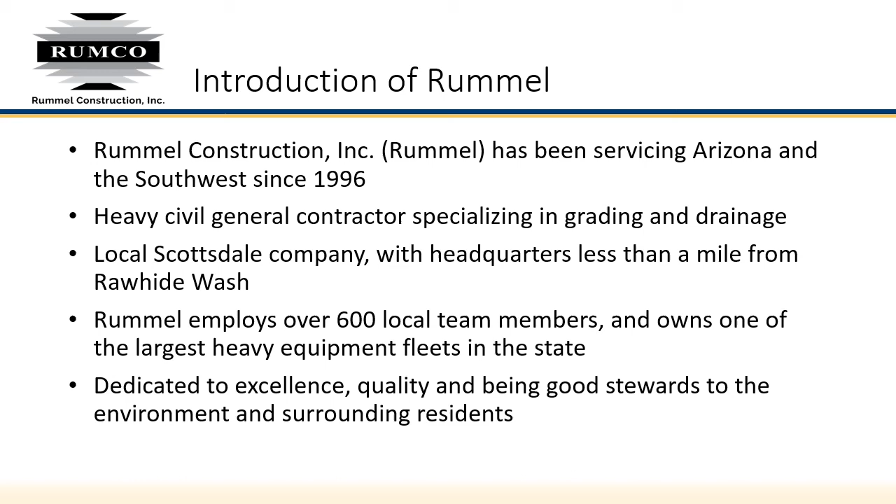Rummel Construction has been servicing Arizona and the Southwest since 1996. Rummel is a heavy civil general contractor specializing in grading and drainage projects. Since we are a local Scottsdale company with our headquarters located less than a mile from Rawhide Wash, we are excited for the opportunity to perform as a community member on this project. Rummel employs over 600 local team members and owns and operates one of the largest equipment fleets in the state. We are dedicated to excellence, quality, and being good stewards to the environment and surrounding residents.

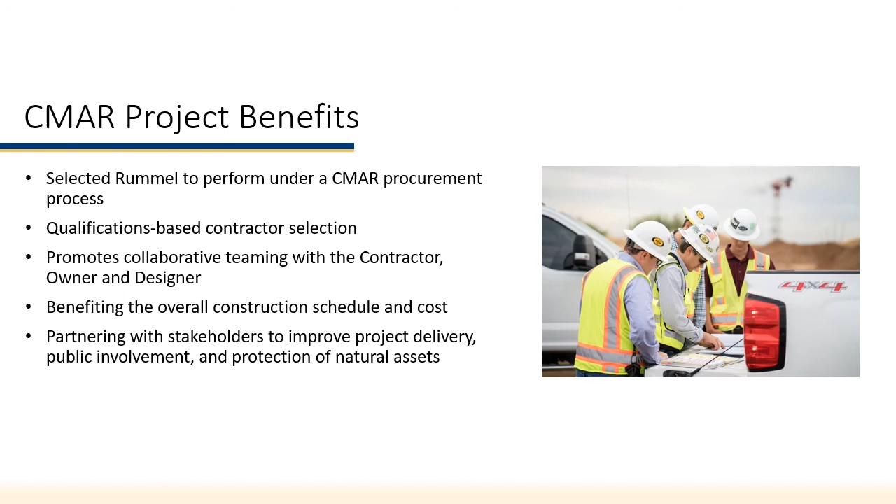For the Rawhide Wash Project, Rummel was selected to perform under a CMAR procurement process, meaning the contractor is selected based on qualifications. This environment promotes collaborative teaming with the contractor, owner, and designer, benefiting the overall construction schedule and cost. The overall benefit allows partnering with stakeholders to improve project delivery, public involvement, and protection of natural assets. Throughout the duration of the project, our main priority is to respect the surrounding residents and provide a sense of understanding and comfort during construction.

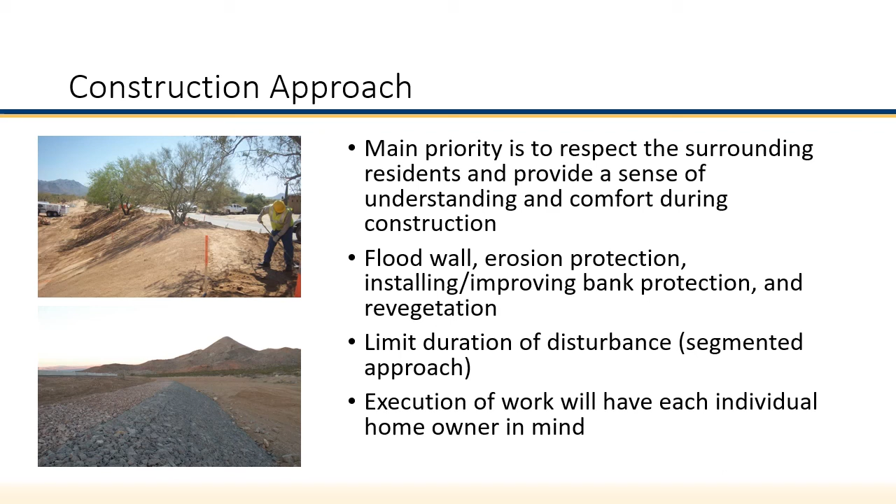Some of the scopes of work that will be involved on this project include the raising of existing flood walls, erosion protection, which could include installing or improving existing bank protection, or adding new bank protection to areas that don't currently have it, as well as revegetating the site back to its original condition with native landscaping. During the project, Rummel will employ a segmented approach, which will help limit the duration of disturbance to each individual section of the project. Throughout the project, it is Rummel's priority to create a safe environment to residents, workers, and the general public. In addition, we will ensure that all property is secure and protected.

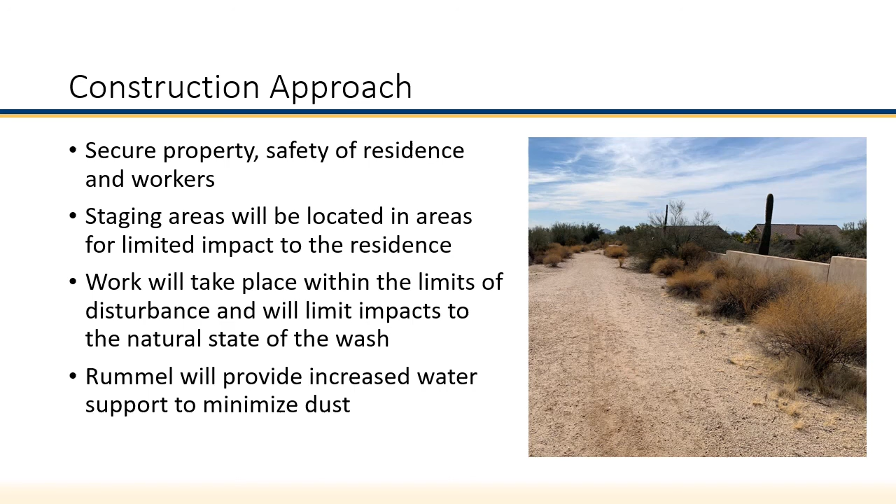Staging areas for equipment and materials will be located in areas with limited impact to surrounding residents. All work will take place within the limits of disturbance and will minimize the impacts to the natural state of the wash. Rummel understands the importance of keeping dust and construction site disturbance to a minimum. We will ensure to comply with all dust control requirements and are committed to acknowledging and alleviating any community concerns involving dust control.

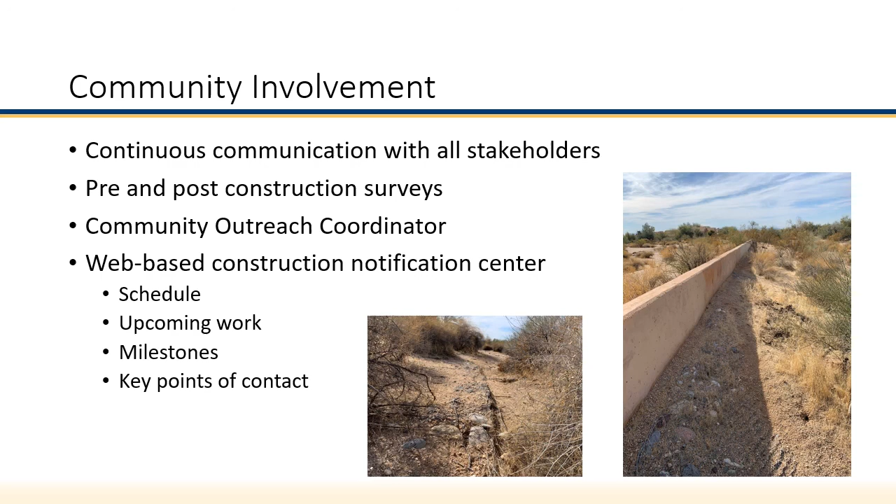One of the key factors of the Rawhide Wash Project is community involvement. Rummel is committed to maintaining continuous communication with all stakeholders. An example of this is pre- and post-construction surveys. This means we will survey before and after construction, ensuring all property is maintained or restored to its original state. In addition, Rummel will employ a community outreach coordinator, providing a single point of contact for residents. This creates a liaison between residents and Rummel, ensuring any and all concerns are addressed. We will provide a website-based construction notification center, which includes updates such as schedule, upcoming work, major milestones, and any key points of contact for the project.